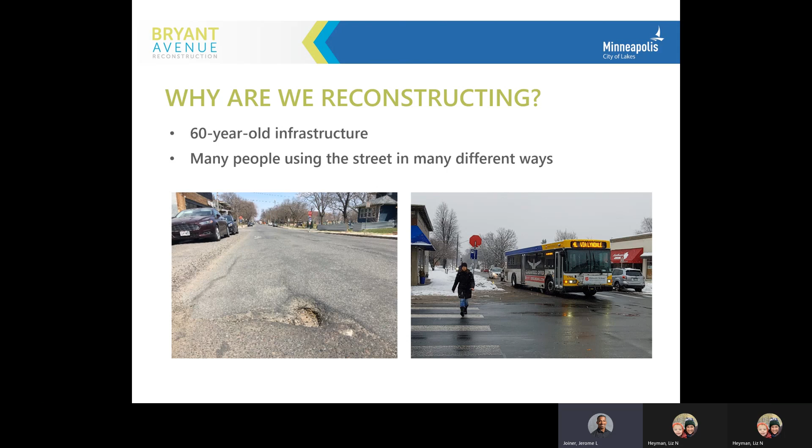We have a bicycle facility along Bryant, we have parking lanes and business nodes. As we undertake this reconstruction, we seek to build and envision the street for the uses it may accommodate in the future.

As far as the project schedule, starting off last year in spring, we had a kickoff open house where we started the goals and visioning for the project. Then we had our second open house in December of last year, where we introduced our draft concept design. All of that, and where we are now, is what we would call the concept design process.

As we move into 2021 and later this year, we'll approach detailed engineering design, where we would presumably have a city-adopted concept layout for the corridor. Then in 2022 and 2023, this project is planned to be phased through reconstruction, meaning it'll be constructed over two years. We don't know which half of the corridor will be constructed first—that's normally figured out during detailed engineering design, after there is a council-approved layout.

So a little bit more on concept design: it's essentially establishing the basic elements of the street, what we will be including as we move forward with concept design in the future. Concept design is a combination of city policy, technical analysis, and stakeholder feedback.

City policy I'll touch on in the next slide. Our technical analysis includes bicycle counts, parking counts, other modal counts along the corridor, speed information we've collected, as well as average annual daily traffic, meaning the number of cars traveling along the corridor. We combine that with city policy and stakeholder feedback to get a concept design.

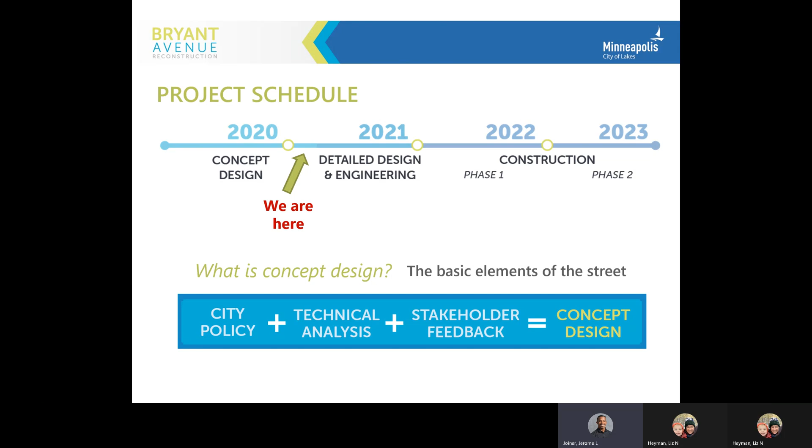A little bit more on the city's policy—I'll briefly speak on each of these. The City of Minneapolis has its Complete Streets Policy, which tells us to design primarily for vulnerable road users. There's also the Street Design Guide, which informs project managers on how to undertake design for future reconstruction projects. And there's the 20-Year Street Funding Plan, the city's policy document or ordinance that informs how we select streets to be included in our 6-year Capital Improvement Program.

There's the Americans with Disabilities Transition Plan, essentially a plan to eliminate all barriers across the city to walking and rolling. The city also has its Declaration of Climate Emergency, which tells us that when we undertake reconstruction projects of this scope, we must ensure they don't have an undue impact on the environment. Then there's the Transportation Action Plan, a 10-year plan that guides how the city will build out its modal networks, and the Vision Zero Action Plan, the city's plan to eliminate all severe and fatal traffic crashes on city streets by 2027.

So a bit more on some of the project goals informed by city policy. For the Bryant project, one goal is to improve pedestrian safety, access, and comfort, and create an all ages, all abilities bicycle connection in the area. This language is enumerated in the Transportation Action Plan, meaning a bicycle facility that's comfortable for a wider range of cyclists—not just those comfortable riding in the street under duress, but those who need a calmer or wider facility.

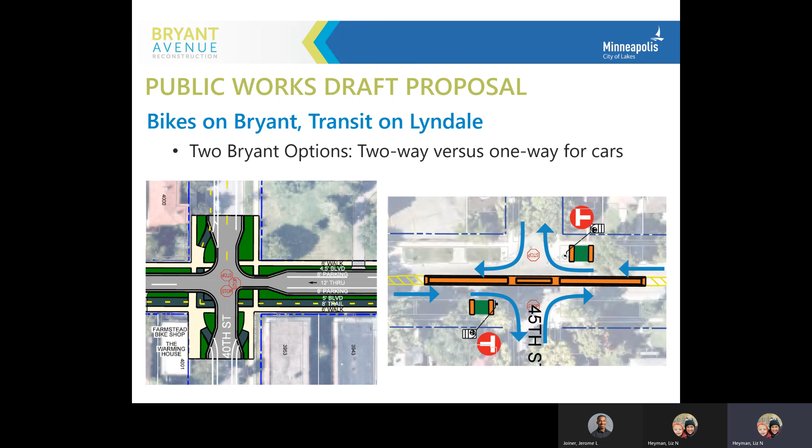First, for the details on the draft transit proposal on Lyndale, as Trey mentioned, folks were looking for much more specificity. We agreed with that. If you check out our project website, you can see full details for what we're proposing on Lyndale. We're proposing to move 6 routes — 3 local and 3 limited stop routes — from Bryant to Lyndale.

We're proposing a combination of 15 new stops, both pullout and in-lane. When we move things over to Lyndale, we get more room for transit amenities, such as bus shelters, and more room for folks to wait while they're waiting for the bus. The one thing to note here is that we are proposing to keep Route 4 and Route 114 on Bryant to serve Walker Methodist's front door. I can talk a little more about how that impacts our Bryant proposals.

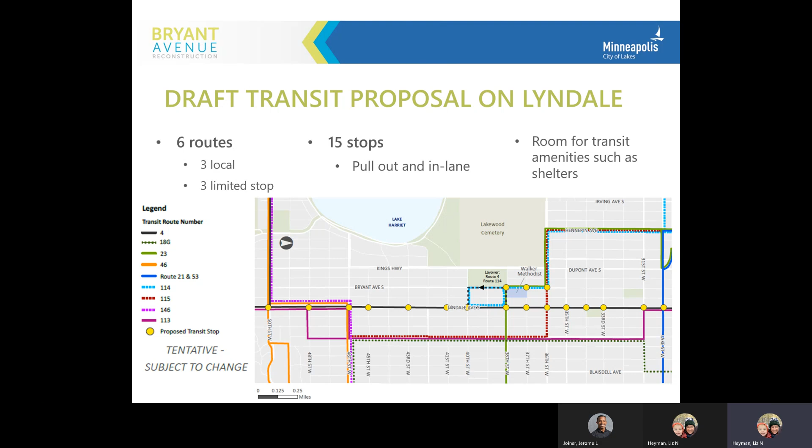First thing to note on Lyndale is that there are minimal changes to typical travel times. We had a lot of questions about congestion and what that would mean, but based on our traffic modeling and existing data, we believe transit times and travel times for a personal vehicle from 50th to Lake Street will change very minimally under this proposal.

These are existing travel times today in the PM peak, the evening rush hour, which is the busiest time in this corridor. We then modeled what transit and traffic would look like on Lyndale in the year 2040, taking proposed land uses, putting them into our modeling software, and running it with existing and projected traffic counts based on those land uses.

We modeled it both without transit and with transit in this corridor. Based on our assumptions, which are fairly conservative for this corridor, yes, travel times will go up compared to existing conditions. But when you compare with and without transit, the typical travel time in this corridor only sees a difference of 15 to 16 seconds.

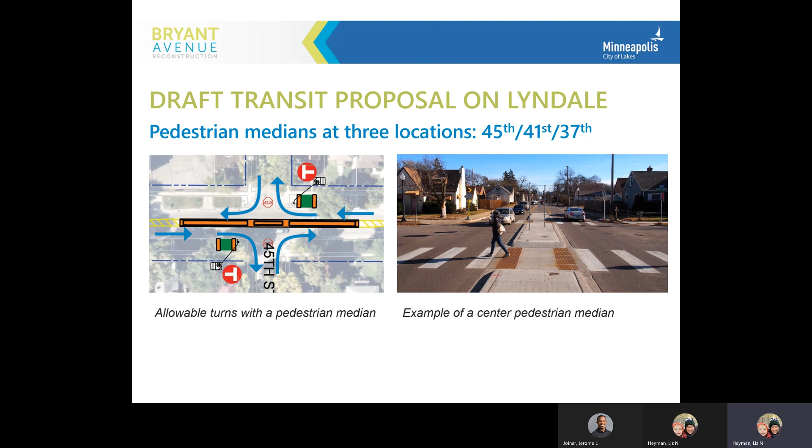This is a right-in, right-out design, so folks will no longer be able to go directly across Lyndale at these locations, nor make left turns. However, based on our data, the movements at these intersections are already low to begin with for the entire intersection, and the straight-through and left-turn movements represent about 2 to 3% of entire traffic movements at this intersection. We believe these impacts will be fairly minimal, but if you live here, this will be a change.

The other location that has more intense improvements would be changes to 50th and Lyndale. I'm sure a lot of you listening know that 50th and Lyndale is a fairly tight intersection, and to enable us to get buses through here onto 50th and onto Lyndale...

We do have to make some curb line changes. You can see in beige where we're proposing making changes to the curb line. But the biggest change that folks would notice would be on the northeast corner, where we have to pull the curb back to make room for a bus stop on that corner. All the other corners are going to look fairly similar.

We're going to maintain sidewalk widths, but the changes that people will notice will be on that corner here. If we could go to the next slide, please.

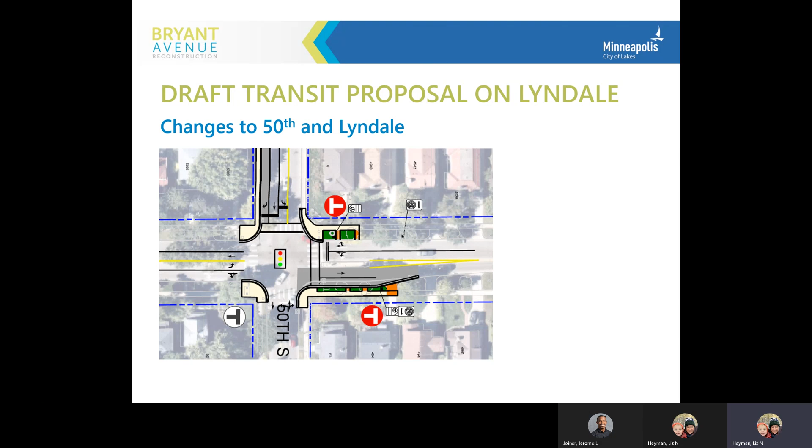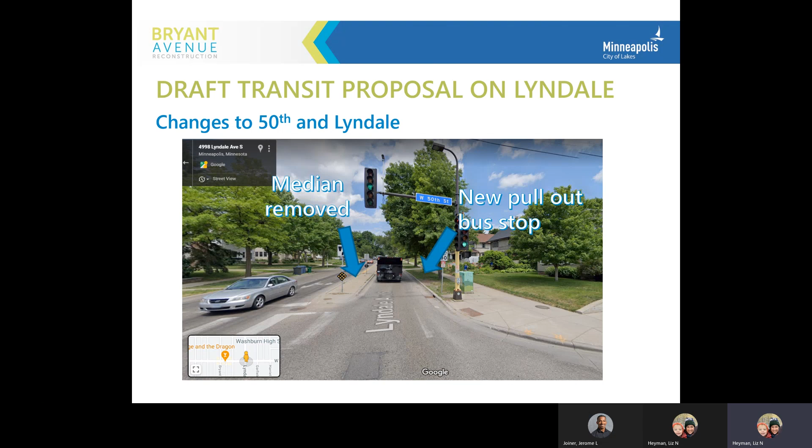The other thing to note is that this project is proposing a mix of pullout and in-lane stops to make this proposal work. A pullout stop is where the bus travels down the street and then pulls out of the lane of traffic to let people on and off. An in-lane stop is where the bus stops in the lane of travel, so people can get on and off, and the bus remains there while folks driving behind wait until the bus moves.

We are proposing in-lane stops at 7 intersections, all of those south of 40th. You can take a look at our detailed plans to see exactly where those are. But again, our traffic modeling shows that this type of design will work and has minimal impacts to a typical travel time in this corridor.

The last thing to note is about how this proposal supports existing and future transit on Lyndale. The Lyndale Avenue corridor is a candidate for arterial bus rapid transit implementation prior to 2040, so it's a midterm priority now for Metro Transit. This is one of the driving factors for why we're proposing to move transit from Bryant to Lyndale.

We know that as we set curb lines on Bryant for the next 50 years, it's imperative that we understand how we're going to have a transit supportive corridor for somewhere in the Southwest Minneapolis area. Lyndale, with its wider right of way, and since it doesn't have a bicycle facility, makes it easier to plan for this transit upgrade as Metro Transit continues to roll out and build out their arterial bus rapid transit network.

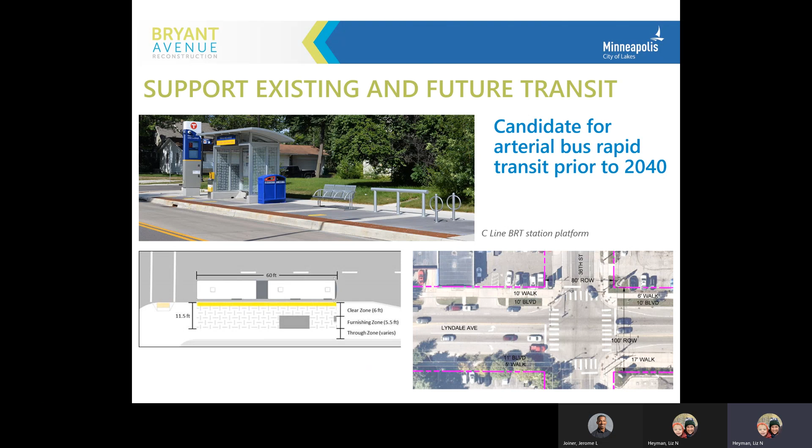Moving over to the Bryant corridor, we're going to introduce a high-level look at our 2 options. You can check out our website for the full details. Those 2 options, as I mentioned, are a one-way for vehicles versus an adjusted 2-way for vehicles.

Starting with our adjusted 2-way concept. Back in December, we brought out a 2-way concept, and we still have that on the table today. This concept is fairly similar to what we brought out previously. It includes 2 lanes for vehicle traffic.

Obviously, that has the trade-off when we put in parking at these locations that you just don't get a lot of green space out of this option, nor can you fit in a large amount of parking when you're trying to prioritize that green space.

But the biggest change that you see is that we've added 14 total parking spaces back in. Specifically, we've added them in at the blocks that had no parking. We heard fairly strongly that people were not interested in having blocks with no parking whatsoever. But when we reviewed our project goals and stakeholder priorities, we do think that the 2-way option, as it was drawn up originally, was pretty close and needed to support all of those goals and priorities and balance them in a way that didn't take away from what we were trying to do on this corridor.

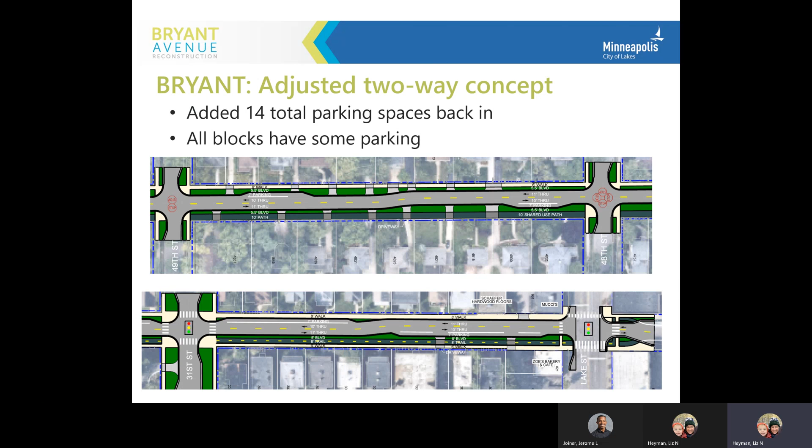So, not a lot of changes, but some to respond to the feedback that we heard on this design.

The one thing that's different with transit on this adjusted two-way concept is that we are recommending keeping Route 23 and Route 114 to provide front door service to Walker Methodist. So you'll see that in this proposal as well — in the adjusted two-way, there's a change to look for between the blocks of 38th and 36th.

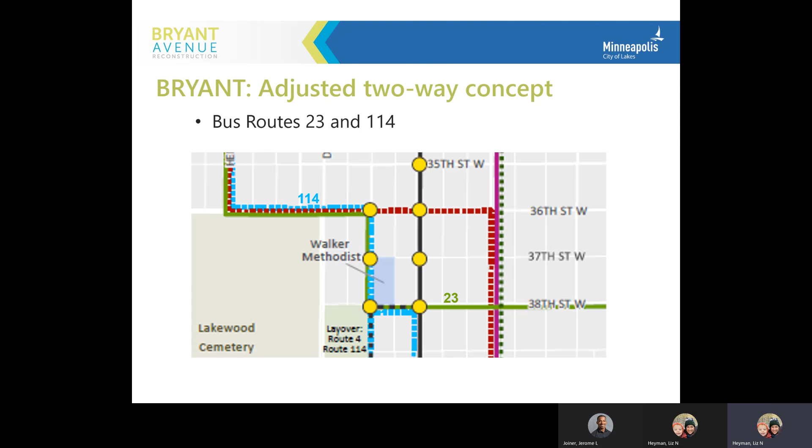Now to go to the one-way. We've heard a lot of feedback, as Trey mentioned. This option is our take at trying to rebalance in a different way to try and meet project goals, stakeholder priorities, and reimagine our right-of-way to balance those to the best of our ability.

This one-way concept has a set of opportunities and challenges, just like every concept at Public Works. Opportunities include being able to provide separate space for bicyclists and pedestrians throughout this whole corridor, so the shared use path is removed in this option. We're also able to provide larger spaces for green infrastructure, and we'll get into the numbers on that. And we're able to provide more parking with this option.

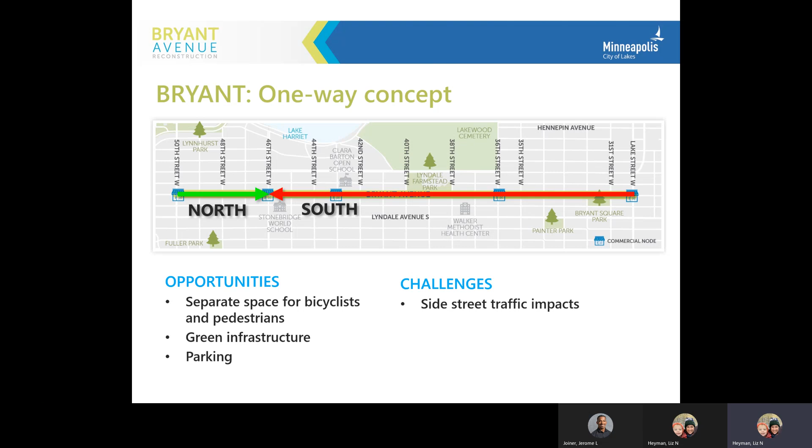The challenges are going to be side street traffic impacts, and I can talk about those in more detail. But first, the thing to note is that this proposal includes a converging one-way design. We're proposing that Bryant would be one-way for vehicles northbound from 50th to 46th, and then southbound from Lake to 46th. There are two big reasons why we're proposing this converging one-way design.

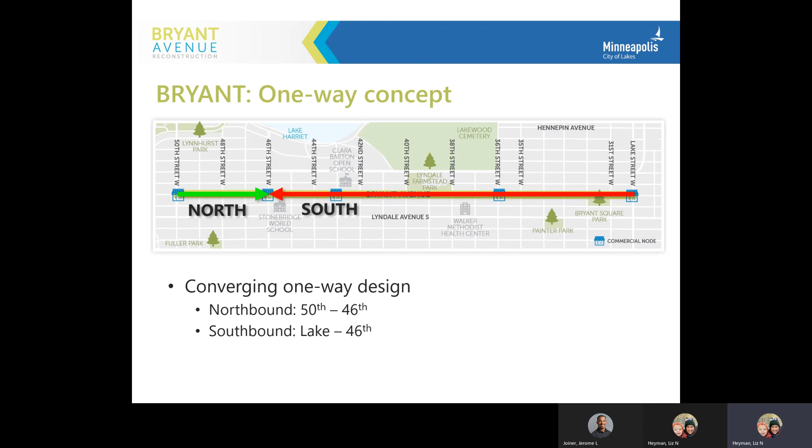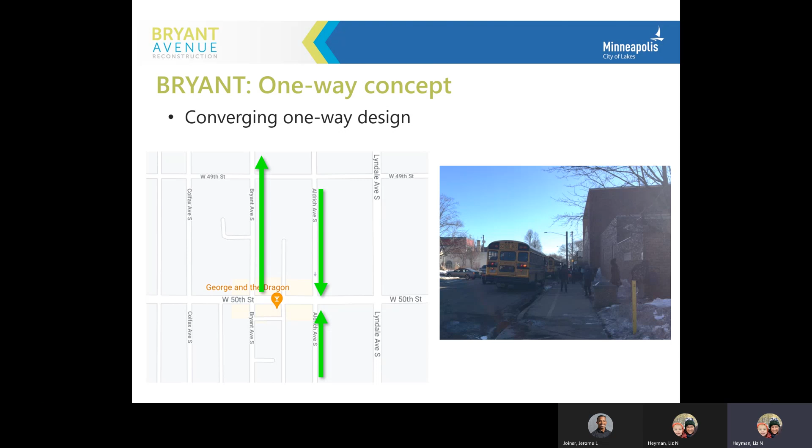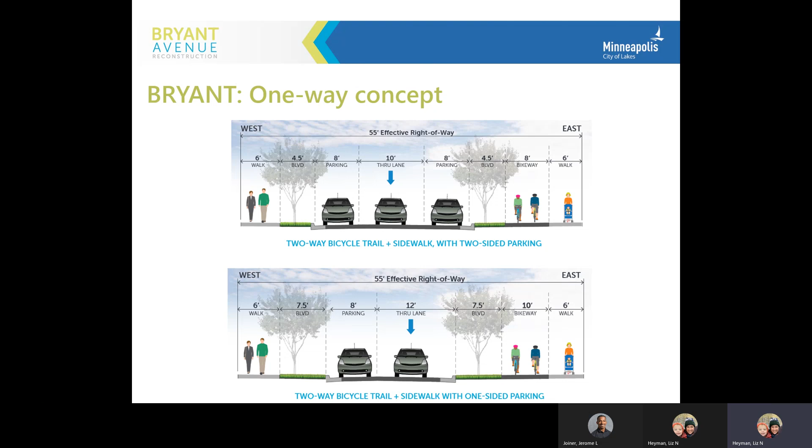Looking at the two typical cross sections you'll see on our website: the first typical, at the top, is a two-way bicycle trail plus a sidewalk and then two-sided parking — so again, we can fit in more parking here. You can see two parking lanes and a singular through lane with pretty healthy boulevards that support tree growth. On the typical section at the bottom, you'll see one side of parking with a 12-foot through lane, and very wide boulevards here, more than typical — 7.5-foot boulevards — and again, a separate space for bicyclists and pedestrians. Those are the two most common cross sections you'll see in the plans.

Getting into more detail on those opportunities and challenges: as I mentioned, the big challenge with this one is that there are likely going to be side street traffic impacts to our residential streets. However, we believe these will be fairly modest based on our traffic modeling in this area. When you remove a vehicle lane of traffic, we expect that traffic to go somewhere — we expect to see an additional 20 to 35 vehicles per hour during the busiest times of the afternoon peak hour.

We expect that increase to happen on Kings Highway, Colfax, and Aldrich — a fairly modest increase, but if you're home during that hour, it could feel different on those side streets. We also expect some traffic to move to Lyndale, with an additional 65 to 100 vehicles per hour under this proposal. However, given that Lyndale already has a range of about 10,000 to 14,000 vehicles per day, we don't expect that additional 65 to 100 trips would be something people would notice on Lyndale.

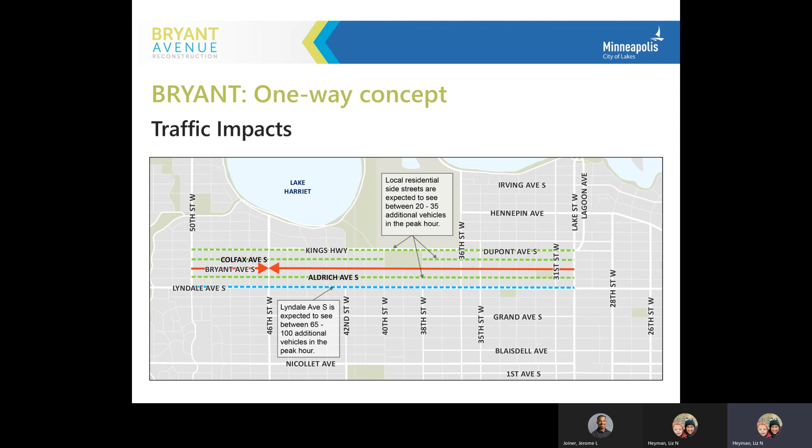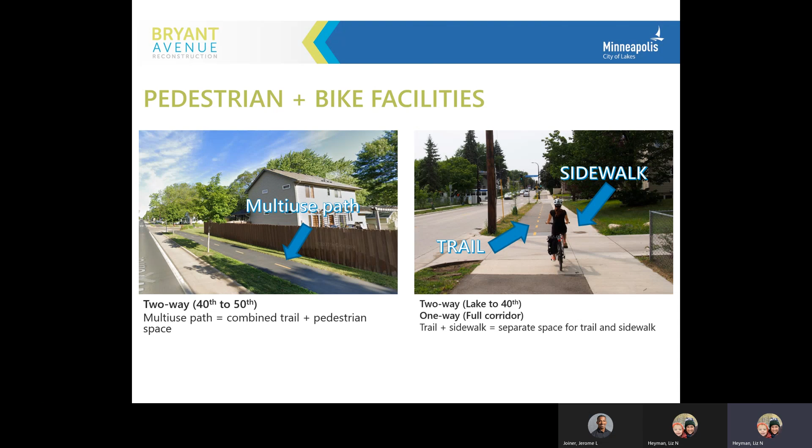The next thing we gain is more opportunities to invest in green infrastructure on Bryant Avenue. In our revised two-way design, we have about 2.7 acres of green space. Under the one-way design, we gain more than half an acre, and we gain it in the locations where we need it most and where it's the highest opportunity. For example, we mapped out our biggest opportunity areas for green infrastructure on Bryant. This block between 32nd and 31st is the example I'll use.

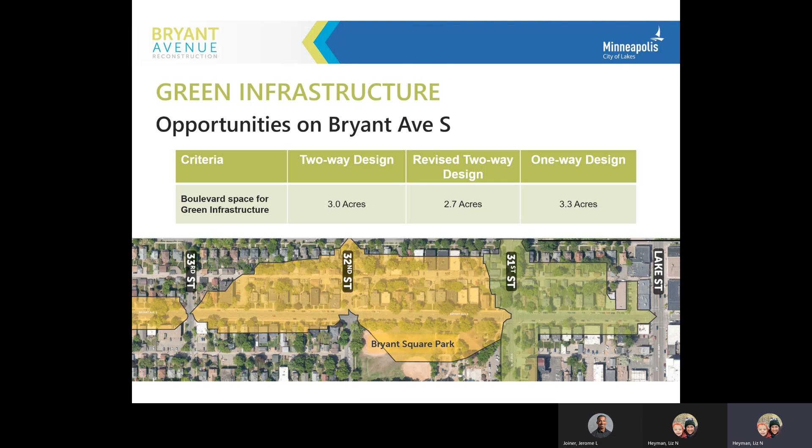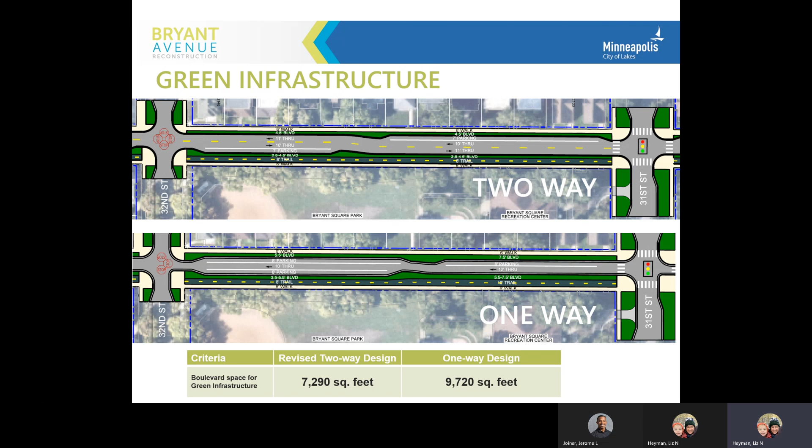This is one of our opportunity areas. You can see the two-way at the top and the one-way at the bottom. Under the two-way, we have about 7,300 square feet of green space, but with the one-way, that bounces up to around 9,700. So almost an increase of 2,500 square feet in green space in an opportunity area that needs it most, allowing us to make the biggest investments we need in green infrastructure in this corridor.

Then the last thing we gain is the ability to put in more parking. Take this example block, 46th through 45th. On our adjusted two-way revised design, we're able to squeeze in 14 parking spaces, but that still means a shared use path and pretty narrow boulevards. Under the one-way, we're able to maintain boulevards that are wide enough to support tree growth, but also have parking on both sides for more than half of the block, and we can fit in 23 spots. So it's a good way to balance the needs here in this corridor.

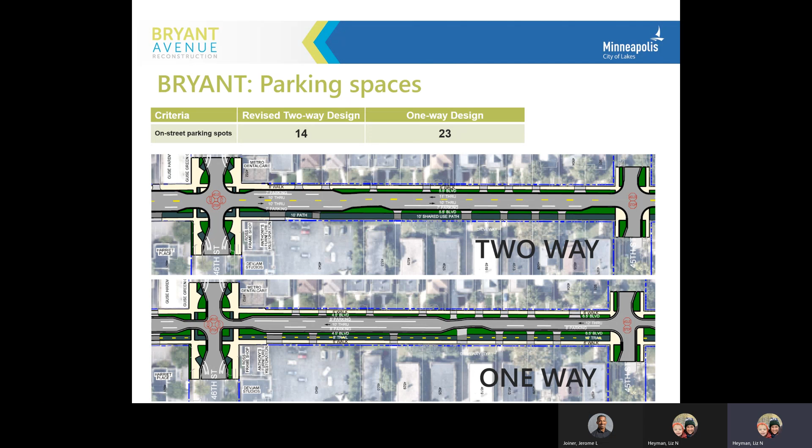Another technical piece here, just like the two-way, on the one-way design we're proposing to keep some front-door transit service to Walker Methodist, keeping the Route 23 and Route 114 for the blocks between 38th and 36th Street. We're proposing to do this with a transit contraflow lane. In these blocks, you'll see two lanes for traffic, meaning transit only can go northbound. That transit also encompasses Metro Mobility and some of the vans Walker uses to transport their residents. We felt it was important to keep Metro Mobility loading with their door in the right direction at Walker Methodist, so residents don't have to cross the street to access their homes. So just one technical thing to note when you see two travel lanes in this location.

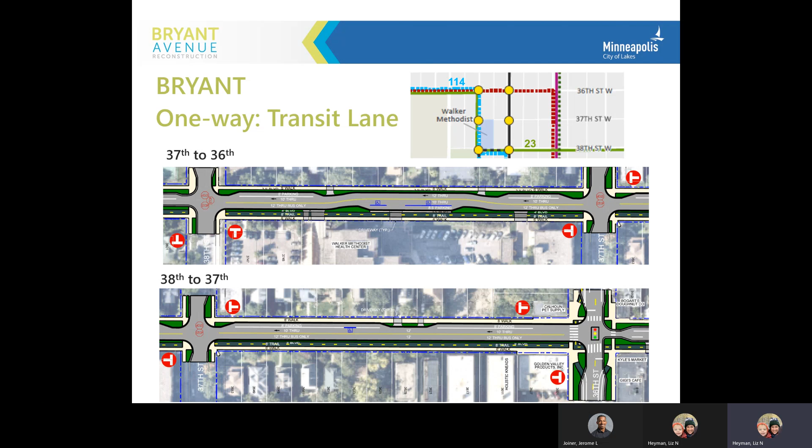So a lot of details, much more — I really encourage people to check out the layouts. But one thing you can do to get a feel for the corridor: we've spray painted our proposed one-way concept typical cross section out in the world at 49th, 40th, and 42nd Street. You can go see it, which helps visualize what this corridor might look like. I encourage you to check that out, as well as take a look at the website.